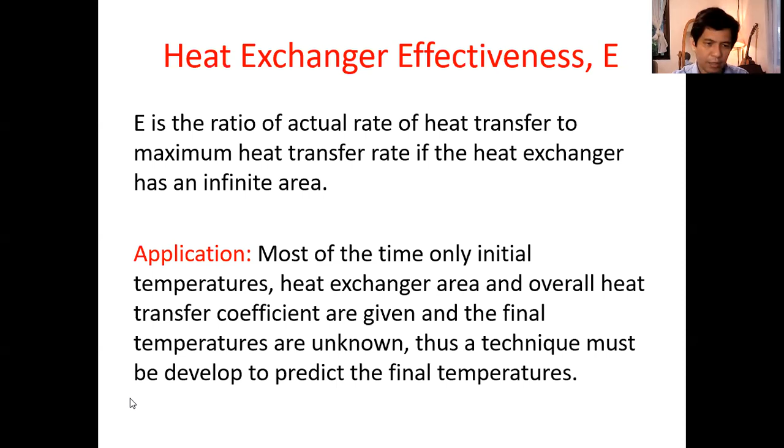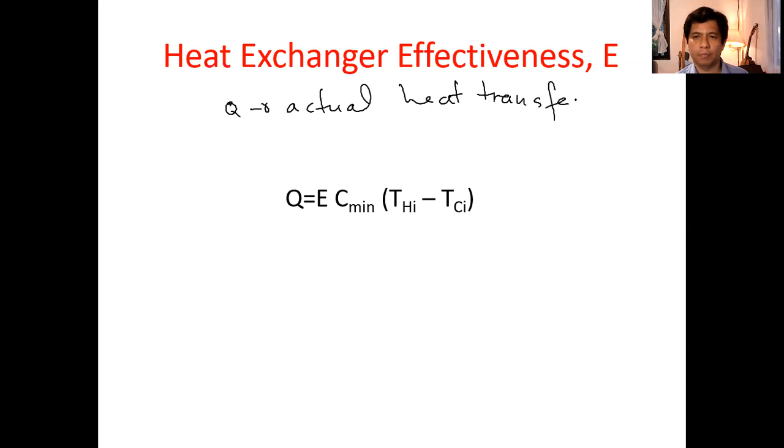So, this is the general equation. Q is the actual heat transfer. Oops, sorry. This is the actual heat transfer rate. Okay? So parang sa Q dot yan, sa thermo. Yung E, yung effectiveness. Ito yun. Yung C minimum, that's your heat capacity. Basically, this is C minimum quantity THI minus TCI. This is the maximum, this part of the equation here, this is the maximum heat transfer.

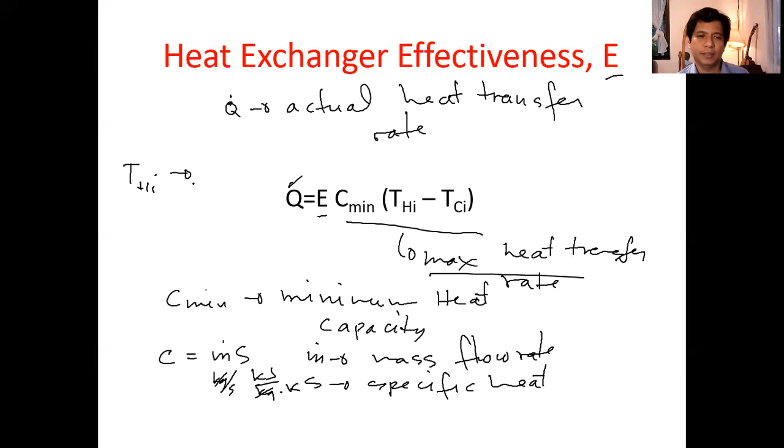So any question? So I hope you see that the E is the ratio of the actual heat transfer dun sa maximum heat transfer. THI, what is THI? Ito yung initial temperature na mataas, no? Initial high temp.

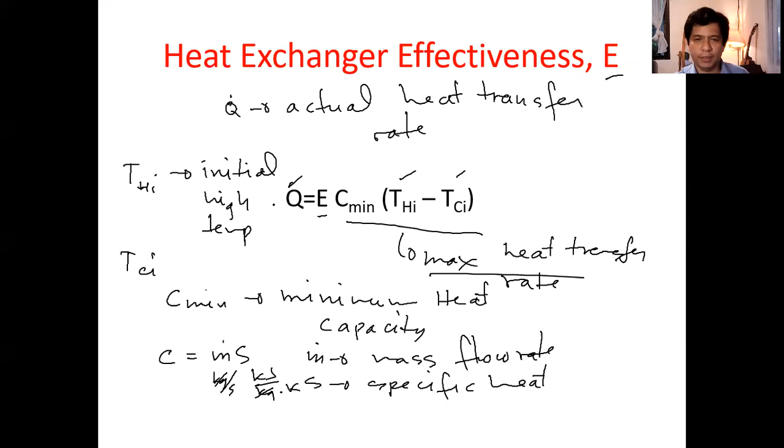Paki-mute, Mr. Hindi ko makontrol eh. Paki-mute ng mga... Paolo, Paseren. Naka-open ng mic mo, hindi ko siya makontrol.

Mute na. Thank you. Oil flowing at a rate of 5 kg per second, and then the Cp or the specific heat of this oil is 2.09 kilojoules per kilogram per Kelvin, is cooled in a counterflow heat exchanger from 366.5 Kelvin to 344.3 Kelvin by 2.0 kilogram per second of water. So the specific heat of water is given to be 4.18 kilojoules per kilogram per Kelvin, entering at 283 Kelvin. The overall heat transfer coefficient U sub O is 340 watts per meter squared per Kelvin. Calculate the effectiveness of the exchanger.

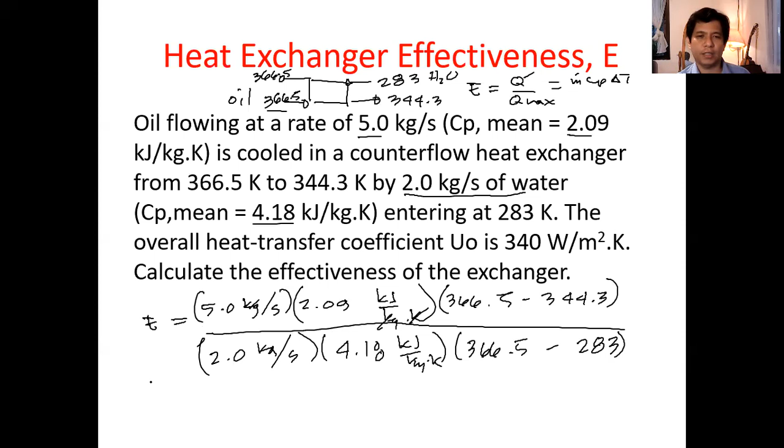Okay? Tapos, we assume na maximum yung temperature na possible sa water, so 366.5 din, and then initially 283 lang siya. So this is how you calculate effectiveness, heat exchanger effectiveness on this problem. Do you have any question? Nakita niyo yung concept kung paano? Just ulitin niyo lang sa calculator. Yun, you're supposed to get ilan? Very good, Paolo Masura. Ano? 0.33.

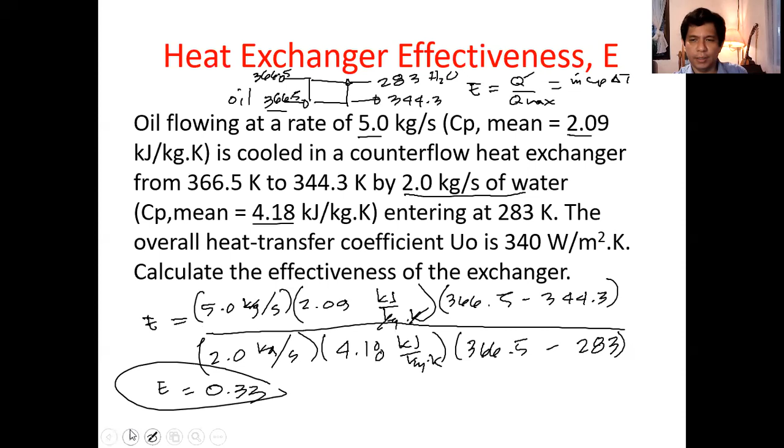Any question regarding this illustrative problem? So if you don't have any question, let's proceed. Okay. So, na-observe nyo dun sa huling problem, actually binigay natin yung isang final temperature. That's why we are able to calculate the effectiveness without using an equation like this one. Medyo mahaba kasi yung derivation. If you're interested sa derivation ng equation na to, you can find in Geankoplis. Pag diniderive ko to, limited kasi yung board sa Zoom.

So, anyway, tanggapin niyo na lang muna na ito yung general equation for effectiveness. So as long as you have the heat capacity ng dalawang stream, Cmin at saka Cmax, you can calculate the 1 minus Cmin divided by Cmax term. Tapos, generally, kung available naman yung heat exchanger, usually given din yung kanyang U, yung overall heat transfer coefficient, tsaka yung area. So, with this, you can calculate the effectiveness or E. Now, with this equation.

So, pag na-calculate nyo yung E, tapos alam nyo yung maximum heat transfer, you can predict the actual heat transfer. Pag na-predict nyo yung actual heat transfer, you can predict the final temperature. Remember, ang application ng heat exchanger effectiveness is for predicting the final temperature. Given yung streams, yung flow rate, yung specific heat, yung initial temperature, at saka yung UO, at saka yung A ng problem, you should be able to predict the final temperature.

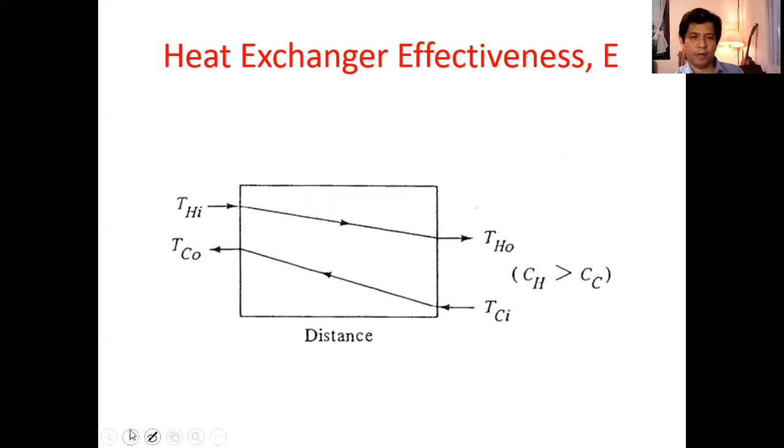Let's try another problem. So the same problem actually. Oil flowing at 5 kg per second, CP is 2.09, is cooled in a counterflow heat exchanger from 366.5 to 344.3 by 2 kg per second of water, CP 4.18, entering at 283. The overall heat transfer U sub O is 340. Calculate the number of transfer unit assuming F is equals to 1. So basically, pinapahanap dito yung UA divided by C minimum. F is yung correction factor sa shell and tube, yung hinanap natin kanina.

So there are two ways to solve this problem. Una, pwede nating gamitin yung equation, and the other one is, kasi 'di ba UA, actually meron tayong U pero wala tayong A. So pag ginamit natin yung equation na Q is equals to F U times A times delta T LMTD, kailangan nating ma-determine yung delta T LMTD para makuha natin yung UA.

So probably kasi given naman yung dalawang temperature dito, you can assume na walang heat loss. So pag walang heat loss tapos yung F is equals to 1, you can calculate UA from this equation, di ba? So pag walang heat loss, you can calculate one of the final temperature, the last temperature. Tapos you can calculate delta T LMTD. Tapos alam din naman natin yung Q, so you can calculate UA. Tapos C minimum is 2.0 times 4.18. That's one way. So let's try to do that.

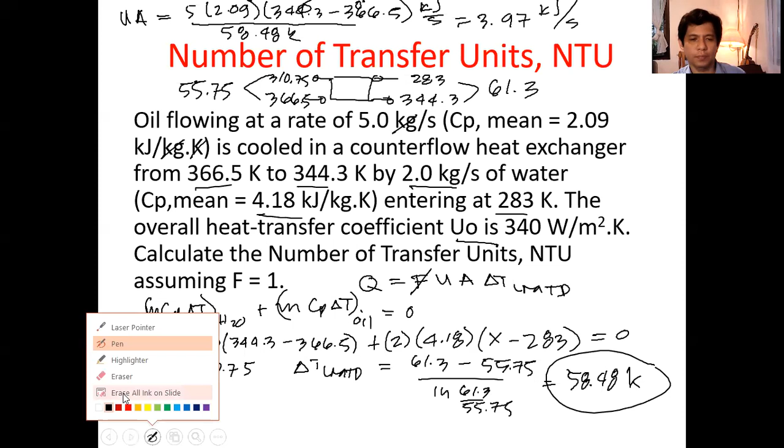So in order to get effectiveness, I'm going to clear this up kung wala naman kayong tanong. Wala kayong tanong so far? Do you have any question? Kasi wala na akong masulatan. So I'm going to clear this up. Yep, palaging positive ang effectiveness.

Okay. So ang NTU equal siya sa U times A divided by C minimum. So na-calculate natin ang U times A is 3.97 kilojoules per second per Kelvin, di ba? Ang C minimum naman, ito yung 2.0 kilogram per second times 4.18 kilojoules per kilogram per Kelvin. Dapat magka-cancel out lahat ng units. Wala dapat matitira. Dapat unitless yung NTU. Ang U times A ay kilojoules per second per Kelvin. Do you have any questions?

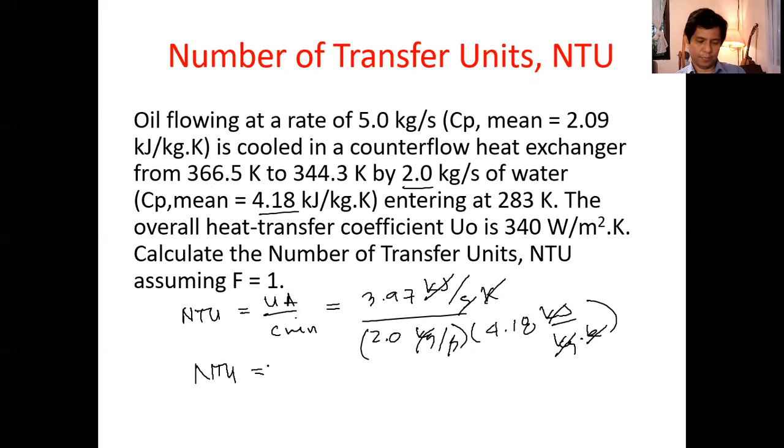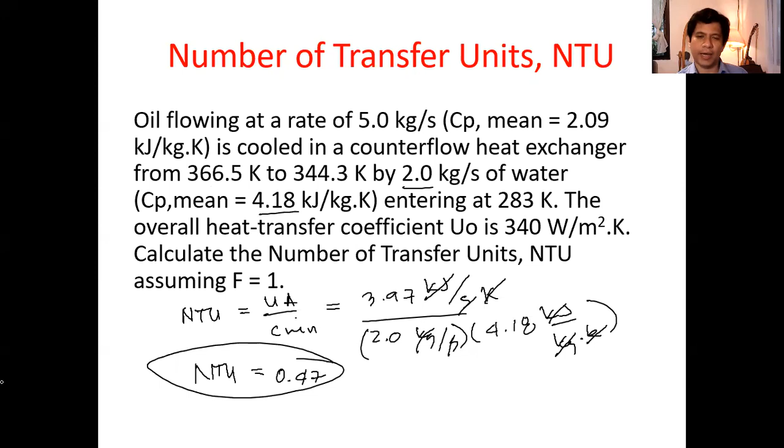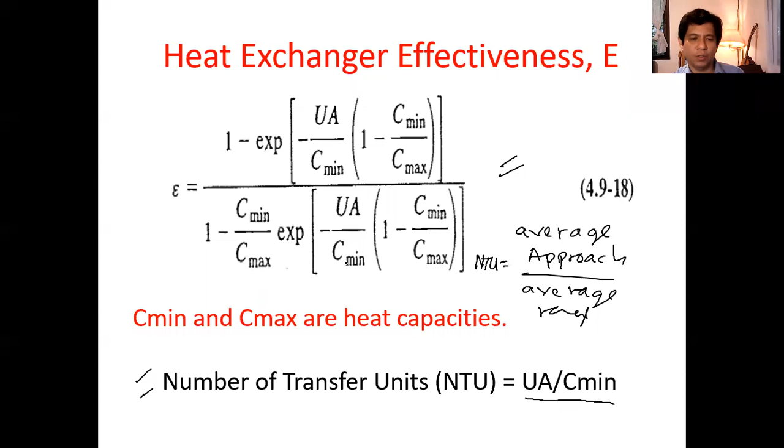So, you should be able to get NTU is equals to 3.97 divided by 2 divided by 4.18. You're supposed to get 0.47. Do you have any question regarding this calculation? Of course, you can also try to use this equation. Let x equal UA over C minimum. Tapos calculate niyo yung C min at saka C max, substitute dito. Na-calculate naman natin yung value ng E, E is equals to 0.33. And then you can calculate NTU, also the same, 0.47.

Dito ba pwede rin? Di ba 0.33? So halimbawa dito counterflow.

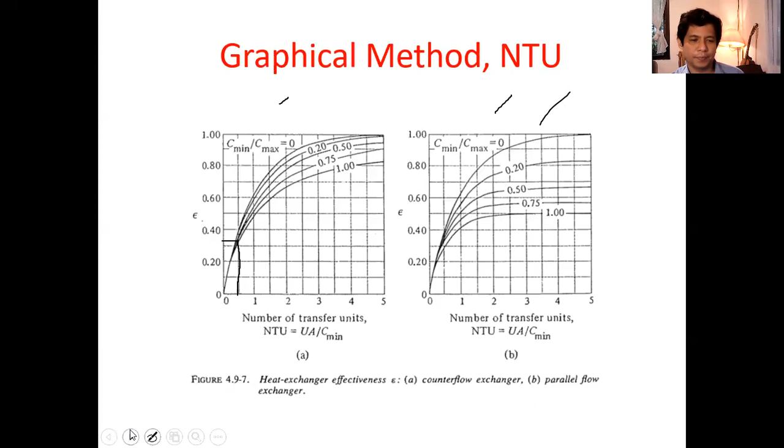Okay, so let's try to solve a standard problem. Example 4.9-2 from Geankoplis. Water flowing at a rate of 0.667 kilogram per second enters a countercurrent heat exchanger at 308 Kelvin and is heated by an oil stream entering at 383 Kelvin at a rate of 2.85 kilogram per second. CP is equal to 1.89 kilojoules per kilogram per Kelvin.